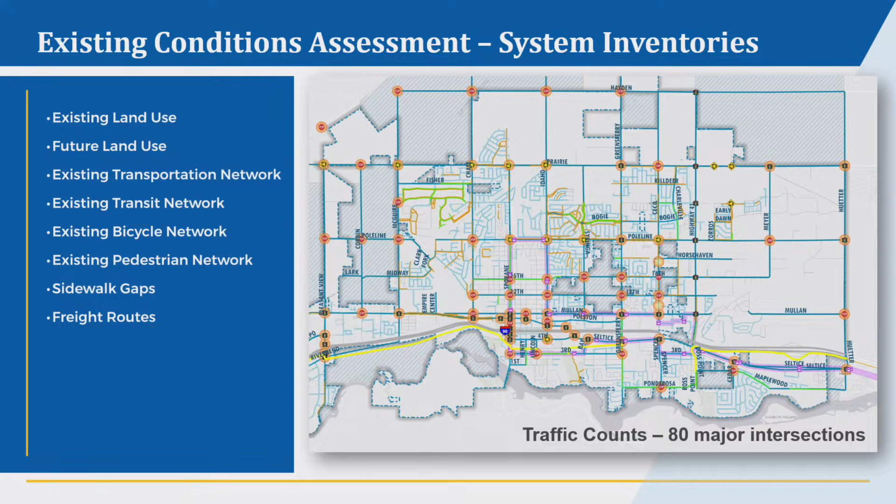Multimodal analysis was the next part of our process. And it really was truly multimodal. Not only did we look very closely at the vehicular system's performance, but we evaluated pedestrian and bicycle potential, and at the same time looked outwardly at local and regional multimodal connectivity, as you can see in the proposed multimodal projects.

And then next, as we evaluated your system from a vehicular perspective, we looked at traffic volumes in the PM peak for current conditions, and also projected that traffic into the future in 5, 10, and 20-year horizons, and looked at the impacts of that traffic on our transportation system without making any improvements, so we understand what the future looks like if we did nothing. At the same time, we looked at multimodal potential, which I'm going to share with you in just a second. We looked at the travel demand model that KMPO uses, refining that, and I'll talk about that a little more closely. And we also evaluated crashes in our existing system.

One thing I wanted to mention here is that to estimate the felt experience of transportation system users, we used our analysis tools to evaluate, as you can see on this slide and in your plan, total hours of system delay across the network in these PM peak hours, estimated amounts of gas burned while you're waiting during that delay, and also the total number of stops during the analysis periods.

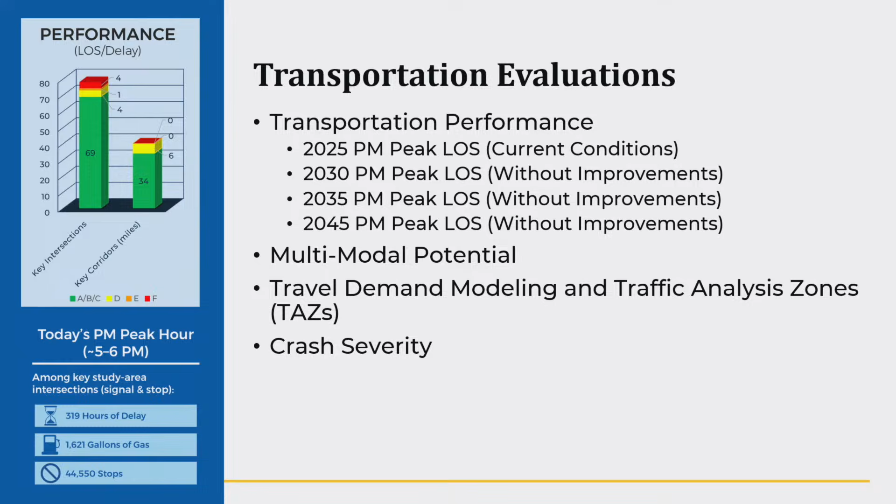Thank you. So that's the number of hours of delay experienced during that peak hour, the number of gallons of gas. And so then that's something that we would compare to in the future, and then in the future with mitigation. So mitigation wouldn't assume that we would get to, say, 0 hours of delay. This is the baseline by which we can gauge how effective those mitigation measures would be, because we've taken it from 319 to 219, and we've saved 100 hours of delay every day.

Yeah. Okay. And of course, we're all going to experience some delay, especially in the PM peak hour, because everybody's getting off work and going to the grocery store and running home and picking up the kids. And so there's going to be delay at intersections, but can we mitigate that delay so that it's minimized and the system continues to flow smoothly?

Maybe you could look at like number of marriages saved or something like that too. That is a great idea. I'm going to write that one down. Homicides avoided.

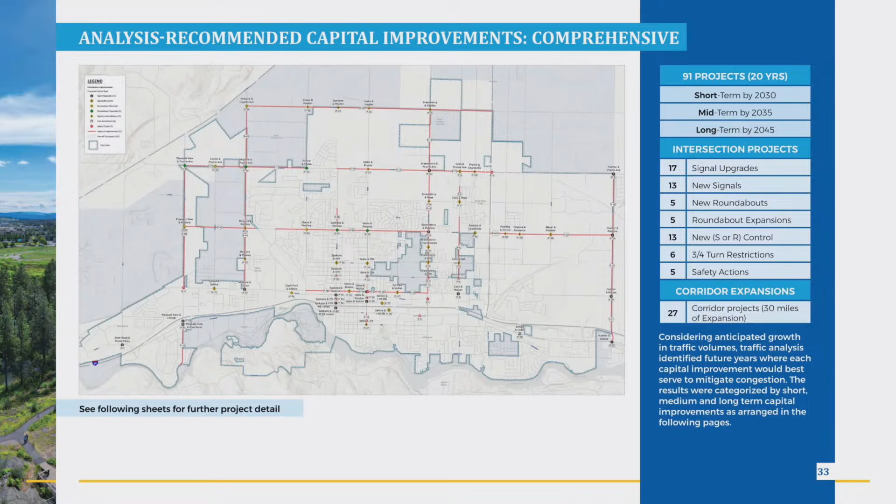So from that traffic analysis, we determined that about 91 projects would be needed to make the system operate really well into 2045. So those 91 projects included recommendations for 13 new signals, 17 signal upgrades, 5 new roundabouts, 5 existing roundabouts that need some sort of expansion, some turn lane restrictions at 6 intersections across the city, 5 projects based purely on safety needs, 27 corridor projects, including 30 miles of roadway

expansion, and then 13 intersections where we identified the improvement needed as either a signal or a roundabout, which provides the city with the flexibility of looking at either one in the future and basing the decision on the current safety needs, current capacity needs, and budget available.

Are these projects prioritized? Yeah, so they are prioritized in 3 different buckets, not necessarily in order. So the way that the project will happen is going to be dependent upon the way that development occurs. We may anticipate that a development is going to happen over here, but it gets delayed and something happens over here. So a project may move from midterm to short term. It may be shuffled around within those different buckets as well. So it's a really flexible plan that allows the city to move projects into different timeframes as they become needed.

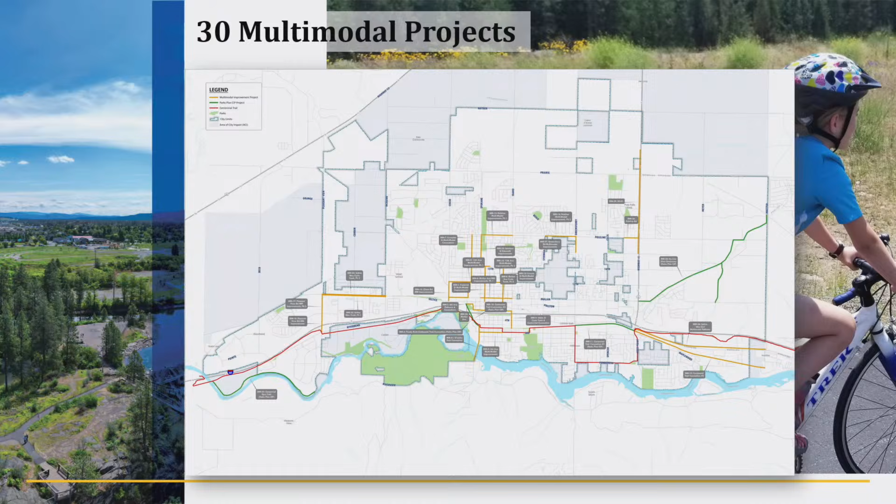So we're gonna put the snow in the bike lane on some roads, is what you're saying? Yes, probably so. Got it. Okay.

All right. So additionally, we reviewed many of the city standards used for development. So we looked at street standards, which is the width of the roadway, how many lanes they have, features such as bike lanes or pathways. And all of those are dependent upon the context of the road and its use and its functional classification. We looked at the operational standards of roadways and intersections, basically how easy it is or isn't to get around and what the city's tolerances are for when a development comes in and puts that extra stress on the roadway. What are they okay with?

And then we also looked at access management standards, which is the spacing between roadways and driveways. Wanted to note here that there's a regional policy that affects this a little bit. The KMPO Critical Arterial Corridor Policy identifies a little bit different intersection and access spacing, and Pleasant View, Prairie, Hayden, and Greensferry are all considered regional critical arterial corridors. And then we also reviewed the traffic impact study standards, and all of these are included in the new TMP.

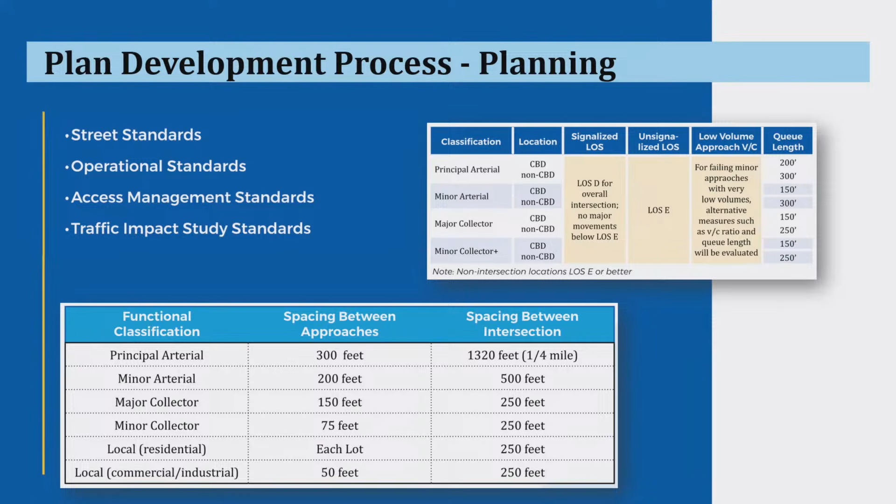So next is the implementation planning. So when do these projects really need to happen? How do we make them happen? Kind of what we've been talking about. We're taking the raw data, the raw output, this is what's needed, and then bring it into what we know locally. So it's all based on timing, based on anticipated growth patterns and our regional modeling. The timing of this is based on the best information that we have now, and again, things will change. But it does provide the city with flexibility to move things around according to development potential, funding availability, and what's actually going on.

So this is a list of our refined short-term projects. This is what we're calling our implementation table. So in the plan, there's a detailed project description, expected cost, including cost sharing, and expected impact fees, direct developer costs, and then other sources such as grants from state or the federal government. So the grand total for our short term is a little bit over $10 million in 2025 dollars.

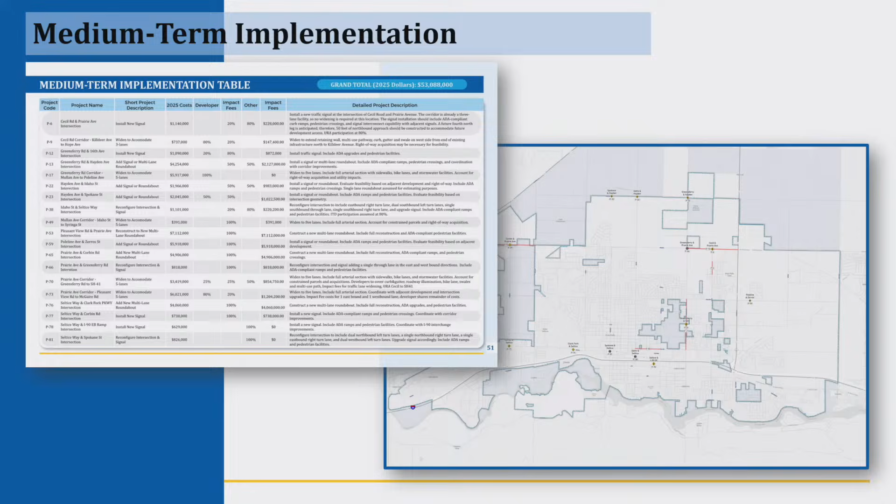So then this is the midterm implementation list. Same information, detailed project description and impact or cost sharing, developer costs, et cetera. Grand total for this group of projects is just over $53 million in 2025 dollars. And then finally, our long-term implementation list. The needs really start showing up here. It's a longer term. This is a 10-year window where the other two were 5-year terms.

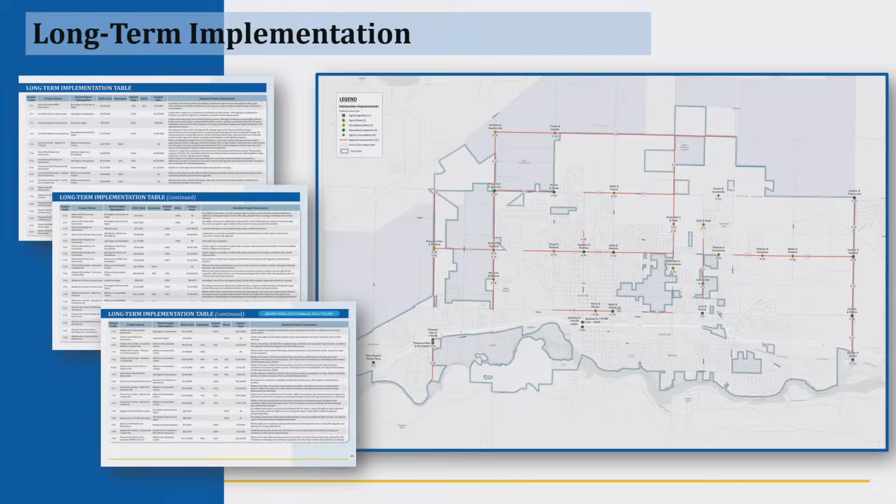Do want to mention here that a significant number of these projects may or may not be needed depending on the outcome of the Rathdrum Prairie Transportation Study and the ultimate build-out of I-90 and what happens with the interchanges along I-90 through Post Falls. So bottom line on this one is almost $262 million. And that's all just capital improvement projects. That doesn't include anything having to do with maintaining current infrastructure. That's correct.

And this is assuming that the growth that we have experienced in our region over the past 10, 15, 20 years continues to occur. So, should there be a slowdown, this would change significantly. Okay.

So finally, in our process was the development of a GIS story map. Two kind of sections of that. So the first part is a community tool. So instead of that 800 page PDF that is super inaccessible for the public, we developed a public-facing interactive map that summarizes the entire planning process and will be available to the city and public with the adoption of the document. With this web map, community members can scroll through and see what projects are planned in their neighborhood or on their commute.

Some benefits is obviously keeping the public informed of what the city's planning and what they've got going on. Additionally, there's some potential time savings to city staff. Say somebody sees an issue somewhere, they can go to the map and they can see that the city recognizes that there's an issue and that there is a project planned for this intersection or this roadway and the general timeline of when that might occur.

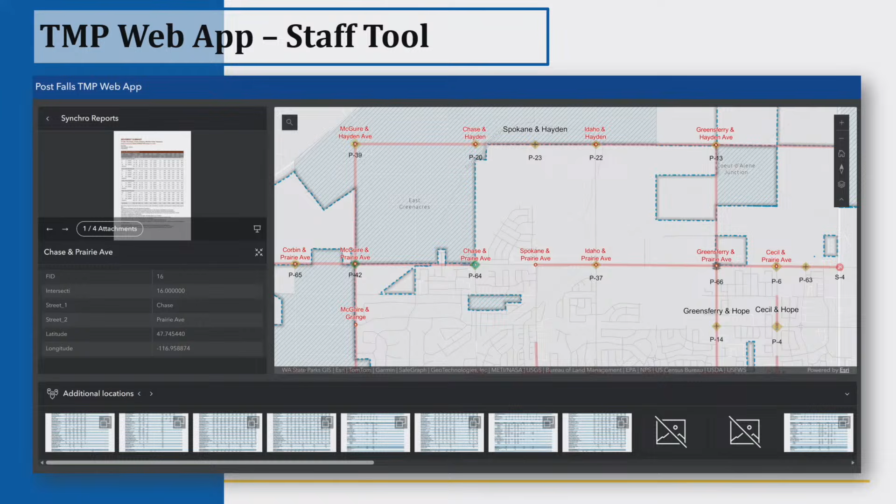and projection data. So in summary, it's a tool for staff that relieves the need of a big, thick document, although I've seen Rob and his well-loved transportation plan all tabbed up. We think this will be a much easier tool for him to use. That comes to the end of our presentation. We'd love to take any more questions if you guys have any.

I'm still concerned about the north-south corridor, and I guess my question with regard to the decision that we're making tonight is, is there an ability to review the master plan and look at the necessity of implementing something that is able to bring commuters north and south, like Prairie, Seltice, and the 90 take residents east and west?

Yeah, so based on the functional classification of the roadway, you go from local to collector to arterial and then principal arterial freeways. Along that step of going up the classification, you're expecting less delay, all the way from there's a driveway every 20 feet on a local roadway where you've got to go 20 miles an hour, all the way up to an access-controlled freeway type of a situation. So

from my understanding, the city network generally is more of that lower classification of roadway, where it's really providing access to homes, access to businesses. There are some arterial roadways that are meant more for that long-range travel. Right. And that's why we have the... And how would one do that from north to south if you needed to go from Pole Line to Seltice?

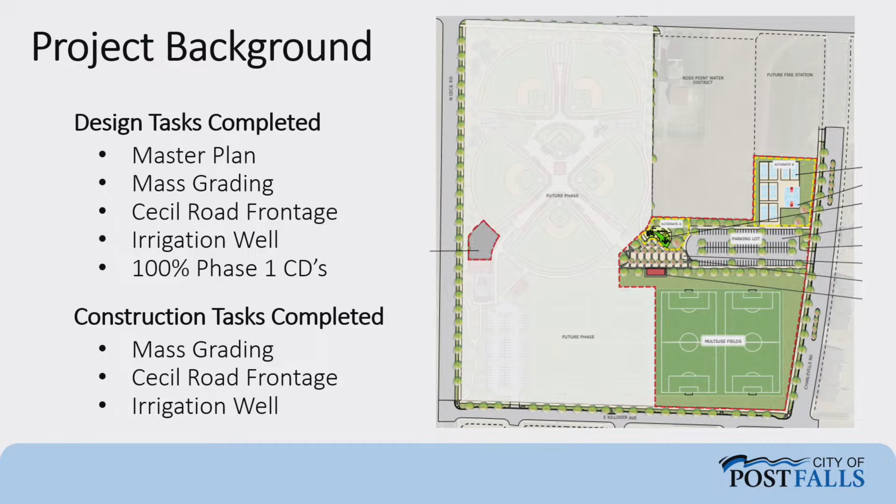So just quickly going through some of the background on what we've done to date, starting back in 2019 with the master plan, and then followed up by the mass grading plan, which then we did the mass grading construction throughout the entire site, and then we moved on to the Cecil road frontage design, completed that road frontage construction, designed the irrigation well specs, installed the irrigation well, and then most recently completed the 100% Phase 1 CD package, and that is the project here this evening for construction.

A few of the recent council touch points. Back in 2024, we requested approval to apply for the Land and Water Conservation Fund grant. A few months after that, we did a lot line adjustment. If you recall, there was a lot line that was going to run right through the middle of our building here, so we moved that lot line just this way here. And then November 2025, we received approval from the state for the Land and Water grant, which was accepted by council.

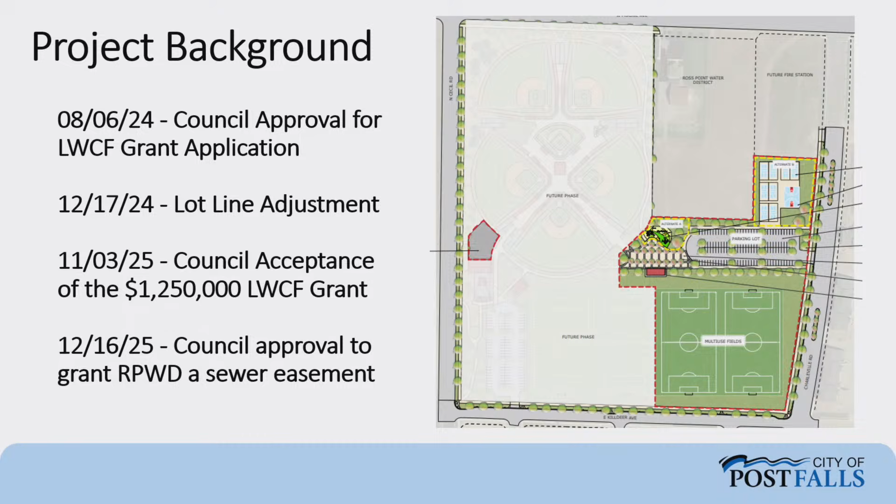And then a month later, council approved an easement for Ross Point Water District for their existing sewer service that runs on the north side of our property here. Was there any discussion in the lot line adjustment conversation about acquiring some of that southern portion of the Ross Point Water District property? No, not at that time. Okay, thanks.

So to recap, Phase 1, we'll be installing 2 multi-use fields, a restroom and a shelter building, a large parking lot, an entry plaza, and then the maintenance yard. And I'll touch a little bit on the alternates in a moment. Those blue things aren't pools, are they? Those are courts. No, they're not.

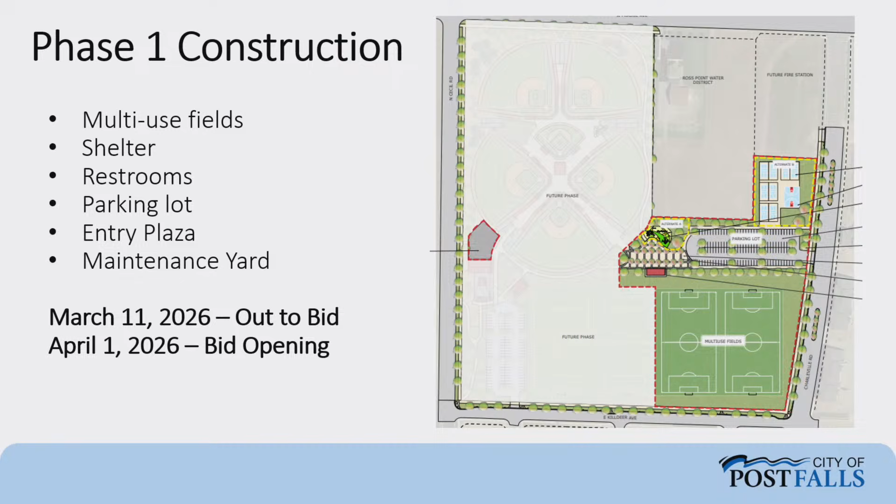So we put this out to bid March 11th and had our bid opening on April 1st. We received 1 bid from LaRiviere for just under $4.9 million, which came in about $138,000 under the engineer's estimate, so pretty close to the estimate, which means we weren't able to move forward with any of the 2 alternates, which one was for the playground and one was for the sports courts. Any guess on why nobody else wanted to bid?

So, great question. We had a pretty good turnout at our pre-bid meeting, which was mandatory. And I would say we had about 40 people there. Not all of them were primes. A lot of them were subs. But I think there were about 5 prime contractors that could have bid it. And we were a little surprised as well. So our consultant did some phone calls to the contractors, and I contacted a few just to see if there was anything glaring that we may have missed.

And a lot of it came down to timing. One of the contractors said they ended up being awarded like 4 projects during that window, so their season was basically full. The other one, again, was just timing part of the year that they couldn't do it. We actually had a nationwide sports complex builder that was there, and he had actually been contacting me every year for the past 4 years. So he reached out to me saying, how did we come in on our bid? And I told him he didn't bid it.

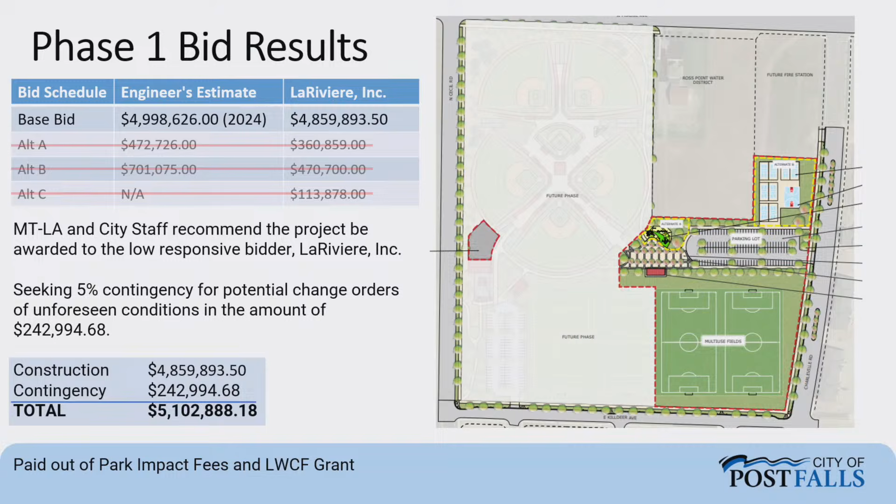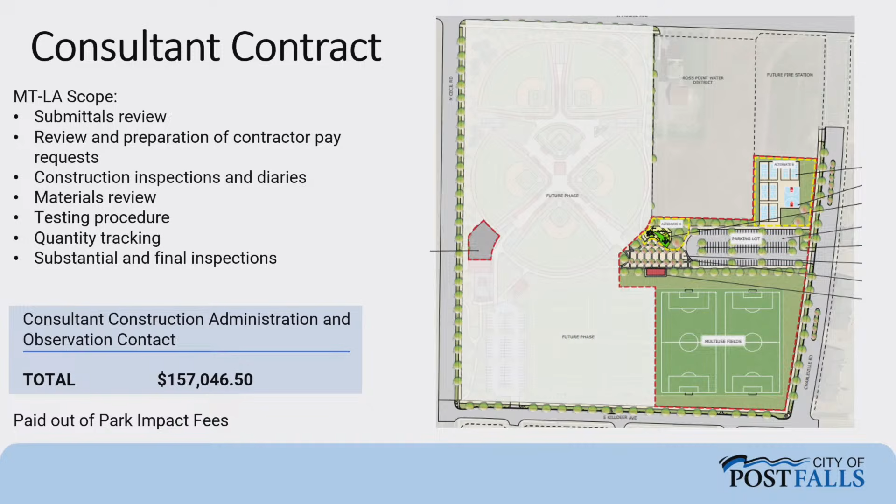And then the second portion, another contract would be with MT-LA, our consultant, for the construction observation throughout the project, which includes submittal reviews, pay app requests, inspections, daily logs, material reviews, and quantity tracking. So that contract came out to $157,046.50, and that would be paid out of impact fees.

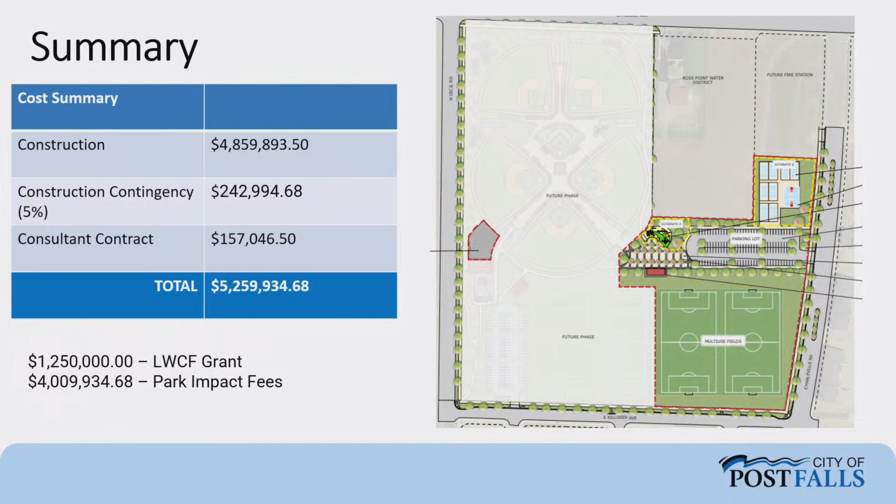So the total ask this evening for both contracts plus a construction contingency is $5,259,934.68. And again, $1.25 million of that being paid out of our grant and the remaining out of park impact fees. If approved this evening, we would issue a notice to proceed for May 2026, anticipating an 8-month construction window with substantial completion around November and final into December, and then most likely contract closeout in a January, February timeline. With that, I'll stand for any questions.

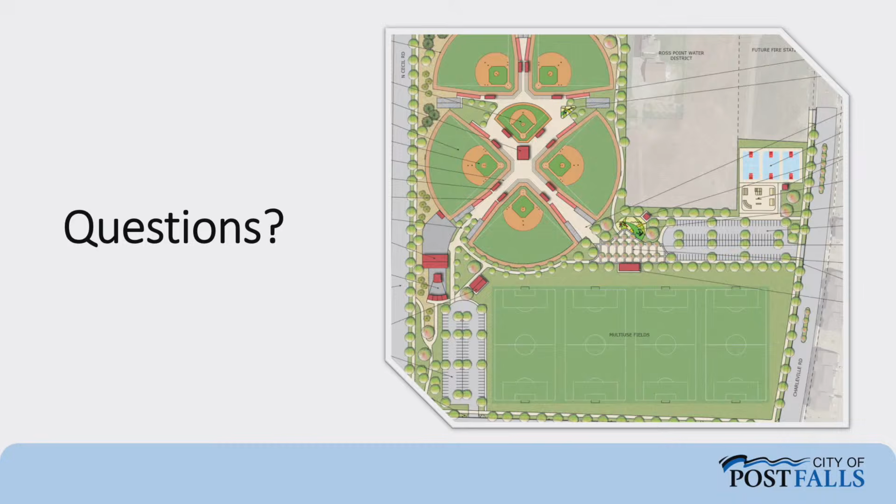If you go back one slide. What's that parcel to the left that's darkly shaded that has a line to it but no description? That is the maintenance yard. Right here? And so that's part of phase one? Correct, yes. So that's where our well is currently drilled, and so we'll be obviously hooking up the pumps for that situation. That's where the main power is coming into the site, and it will be where a future maintenance building is, which you can see right here. Okay. So it will be fully fenced at this point and a gravel maintenance yard.

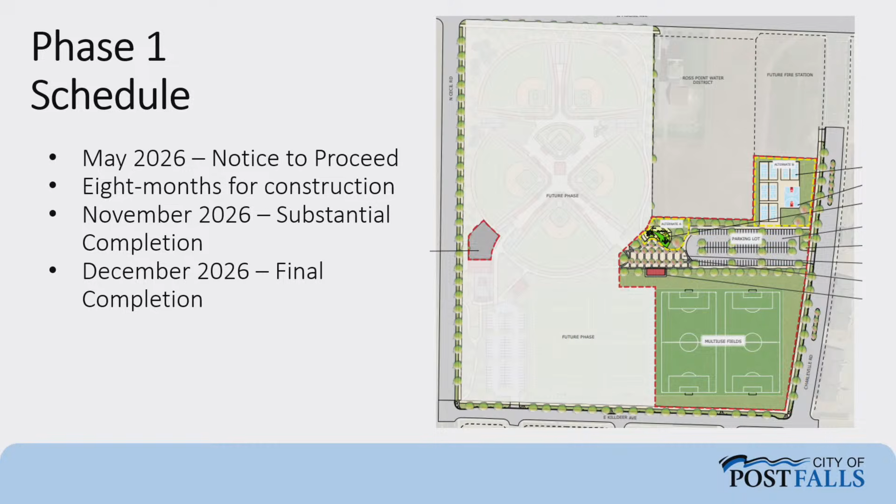Are there bollards to keep vehicles, vandals from traveling on the fields? Yes. There's a curb, and we do have bollards kind of in this area here where there's the ADA access. They also have curb stops for those, but the ADA is flush. But the bollards are there actually more for a maintenance standpoint, so we can access them. Some are removable, and we can access the fields. Thanks. And we do also have bollards in this area here as well to prevent vehicles from traveling into the plaza, but the plaza is set up to be used for food trucks et cetera, so we do still need vehicle access to there as well.

Further questions? Quickly, with La Riviere's bid and your contingency, you're about 104,000 over your engineer's estimate. Is that of concern to you at all? No, I don't think so. We have it budgeted either way, and I think the estimate didn't even include a contingency, or I guess it was kind of built in. But the short answer is no. Okay. We have it planned for the future. Everything is still laid out on track for all the other projects we have committed to as well.

I would move to approve the Quarry Sports Complex Phase 1 construction agreement. Second. Motion and a second. Further discussion? Roll call, please. Mosby, aye. Blue, aye. Ziegler, aye. Stigleader, aye. Luca, aye. Malloy, aye. Motion passes. Thank you.

Next up is Seltice Way Rehabilitation and Pipeline Project recommendation to award. Good evening, Mr. Mayor, members of the council, Andrew Arbini, Projects Division Manager. So this is a very significant project for both the Utilities and Streets Division. It will accomplish both current and future needs. As such, we've taken a team approach in presenting all the information tonight. So together, Jackson and I will cover the project material. Just to clarify, this presentation includes both items B and C on the unfinished business. They are separate action items, but related as they're connected to the Seltice project.

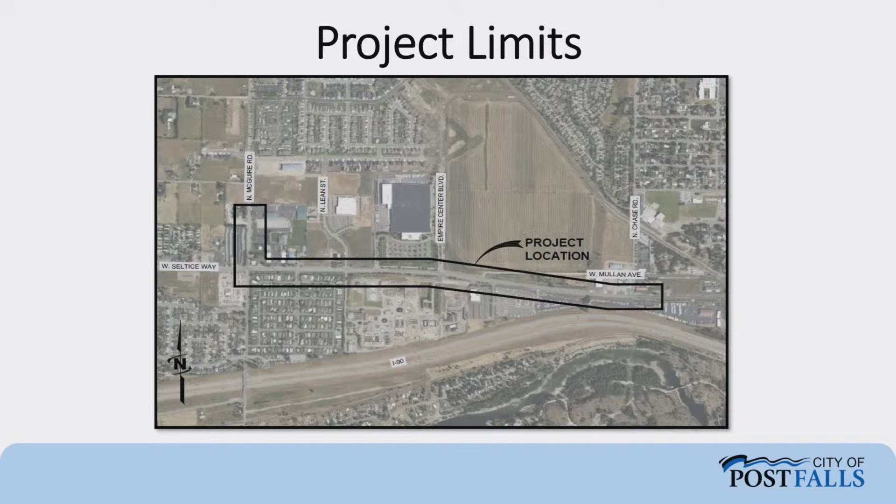We did put together an outline of the presentation. I'll cover the first half, talking project background and the history, and then Jackson will cover the construction phase and the request of council this evening. Project limits are Seltice Way, generally from Chase Road to McGuire Road. So I'll start with what we're building with this project. This will install the future utility needs in Seltice Way. This is all the wastewater pipelines that have been identified in the master planning documents.

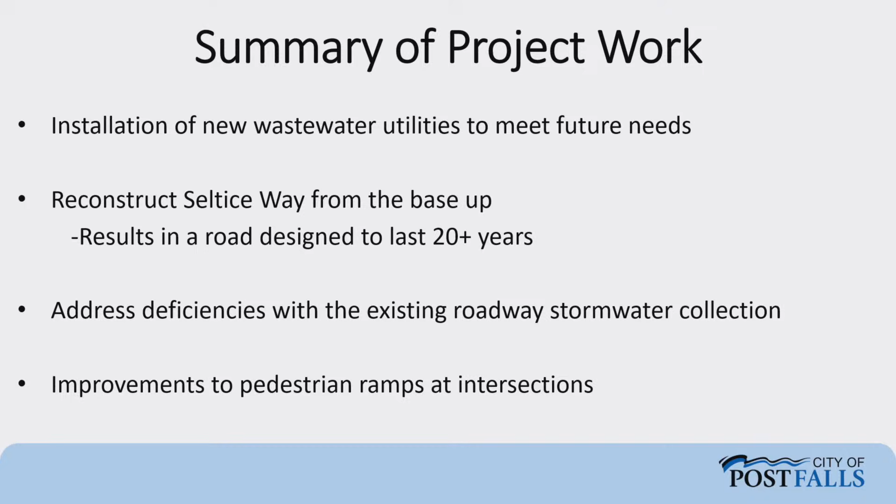As a result, we're reconstructing the roadway. This is a complete rebuild, removing all the subsurface material, including the original concrete highway underneath the roadway. So it starts from the subgrade and we'll rebuild back up. That level of work is based on a 20-year design, so envisioning that this road will last at least 20 years. We will also be addressing some stormwater deficiencies within the corridor and making some minor improvements to pedestrian facilities and the trail that runs through the project area.

Andrew, did it have to take it down to the base because of neglect over time? It's unusual, isn't it, to go that far down? So there's a combination. Yes, this is the first project that I've been involved with at the city where we've done a full rebuild of the roadway. Historically, this was the US 10 highway that ran through that corridor. It was approximately 20 feet wide. Over time, Seltice has built on top of that roadway. So there's been improvements done, but nothing that's addressed the subsurface area.

So I'll talk a little bit about how we started at rehabbing the road. As we got into that design, it became clear that there was an opportunity to also include the underground infrastructure that's needed in the future. So that also drove some of the decision-making in removing that concrete and subsurface material. But there was a large amount that would need to have been removed without putting the utilities in the ground. That probably covers a little bit of the talking points I was going to go through one by one.

So the existing pavement's in poor condition, and to the best efforts of the Streets Division, we've been able to maintain that and patch it, but the ultimate solution is to replace the roadway. A pavement condition study was done around 2020 citywide, and that confirmed that Seltice does need some attention. We supplemented that with a geotech report, working with a geotech firm, and they were able to map out the subsurface area as well as the extents of the concrete highway underneath.

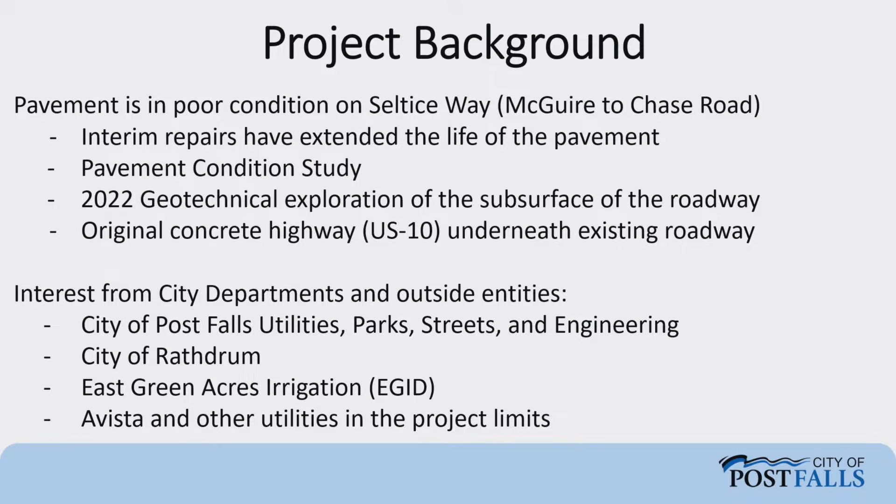So during the design, we brought two separate MOUs to City Council. Those were approved. One was with City of Rathdrum and the other with East Green Acres Irrigation District. I'll run through each one just as a background of what's entailed here. So for those that may not know, the City of Rathdrum pumps their wastewater to the City of Post Falls and is treated at the Post Falls Water Reclamation Facility.

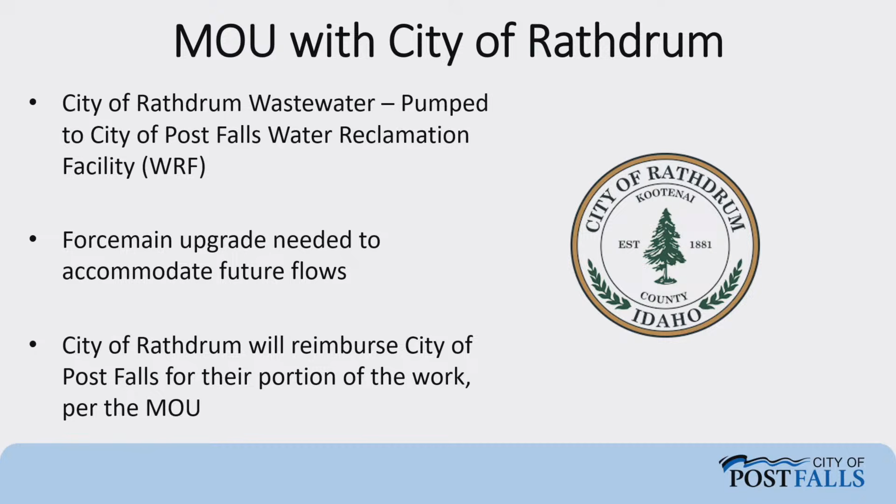They have a need for another force main pipe to accommodate future flows. So similar to City of Post Falls' future wastewater needs, they also have similar needs. They were very interested in participating in the project and combining their work with ours. That MOU outlines reimbursement from City of Rathdrum to Post Falls for their portion of the work.

And similar method, we initiated an MOU with East Green Acres Irrigation District, so EGID for short. They are a water purveyor that serves a portion of the City of Post Falls. So they have infrastructure in the Seltice Way project limits. There's an agreement in place between City of Post Falls and EGID that predates this project.

And that essentially outlines that the entity performing construction work impacting the other entity's infrastructure shall be responsible to protect the other's work. So in short, City of Post Falls is responsible to protect East Green Acres' work as we impact it in this area. East Green Acres will perform that work, they'll protect their lines, and then they will be reimbursed by the City of Post Falls for that protection. That allows them to remain in control and ensure that their work is getting done per their requirements.

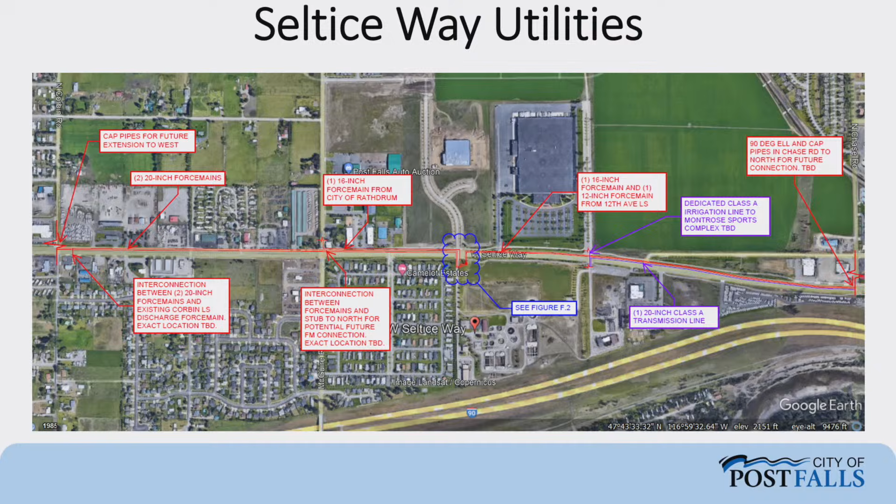So summarizing the benefits of having both of these MOUs and these entities, really it got all of us talking early on in the project, and we were able to coordinate and identify those opportunities. And then through the MOUs, we're able to establish the roles and responsibilities of each of the parties. So I'll call this the Crayola version of the utilities and what we're putting in the ground. It's 6 different pipelines that we're installing, including City of Rathdrum's line. So a significant amount of infrastructure that will go in ahead of rebuilding of the road.

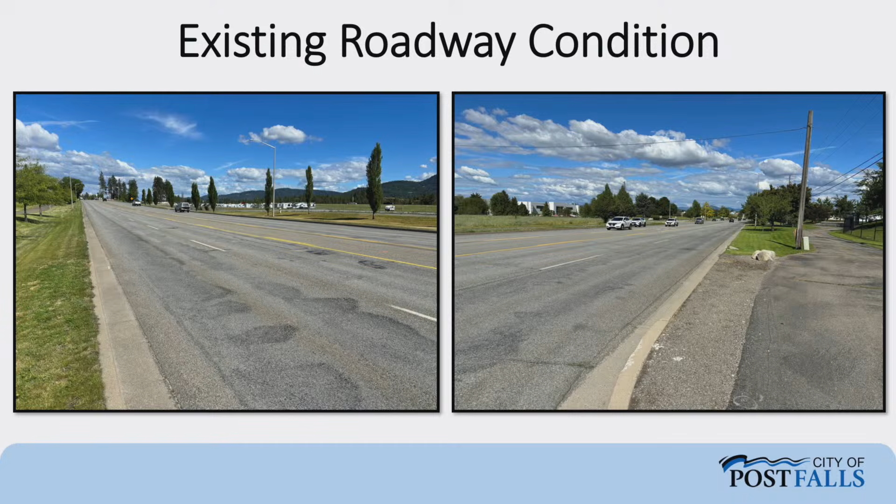Good evening, Council. We had to keep it interesting for you, so fresh face.

So we opened bids for the project on March 24th. MDM Construction Group was our low bidder at just under $5 million. Engineer's estimate was 9.3, slightly under that. The bid that came in from MDM has been determined to be the lowest responsive bidder. Their bid amount came in with the requested contingency that we're asking for of 10%. The total request we have for you tonight is $5,429,878.30.

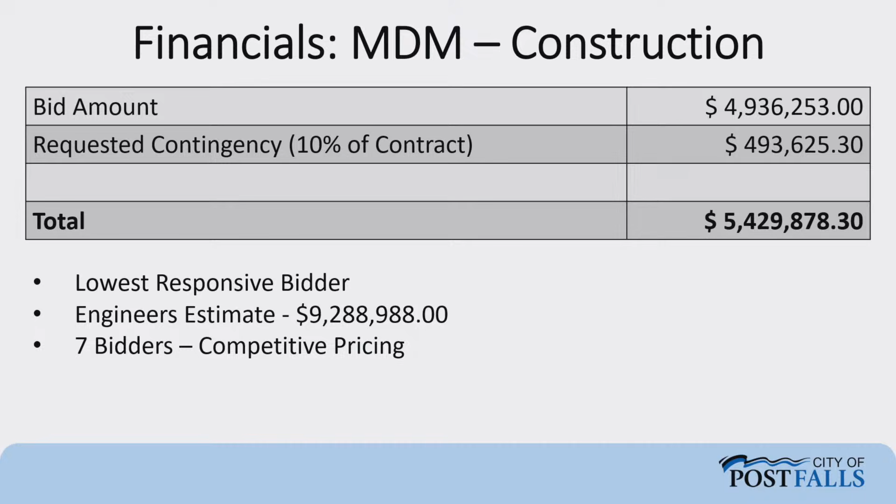We did get 7 bidders on the project, and there was a handful of bidders that were fairly close, so we feel that it was a competitive bid environment. Construction management services on this project are more significant than they have been on previous projects. Large reasoning for that is that we cannot shut down this entire corridor to the city. To be able to complete our project, we had to go about this in phased approaches to allow for traffic to go back and forth during construction.

We will have some limited closures of the McGuire and Chase intersections. So there can be some anticipated night work as well as some work outside of Monday to Friday to try and efficiently get those intersections done for the public. We also anticipate 2 construction seasons, and we will have full-time observation on site. So that's some of the explanation for why services are more for this project than others. So during construction, with that phased approach, you're going to have observation on both sides versus closing down the entire road. And we have some pretty comprehensive public outreach planned to help mitigate traffic impacts to the public during construction.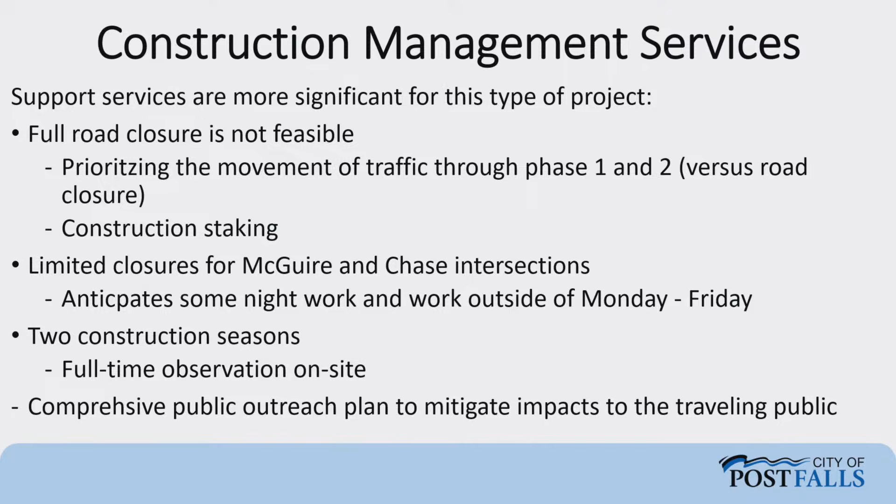The award itself, so the contract amendment for construction management services is the 1.2 million number. We are requesting a 10% contingency on top of that, retiring all unused contingency from the design contract. So the total ask for CMS tonight is $1,353,770. The total request for both the construction award and the CMS service amendment is $6,783,648.30.

How much unused contingency did we have from the design phase? I would have to get you an exact number, but it is absolutely above 80,000 or so. Close to all of it? Of the management reserve contingency, yes. And then it was retired to where? Back into the budget line item that it would have come from. Okay. Great. Perfect.

During all of this, and per our MOU and conversations with Rathdrum, Rathdrum would be invoiced their proportionate share. That is an important point to note. So, do we know roughly how much that is? Yes. So overall project cost share. These are approximate numbers because during design versus construction management, some of those numbers fluctuate slightly. But overall project cost is estimated to be approximately 7.9 million.

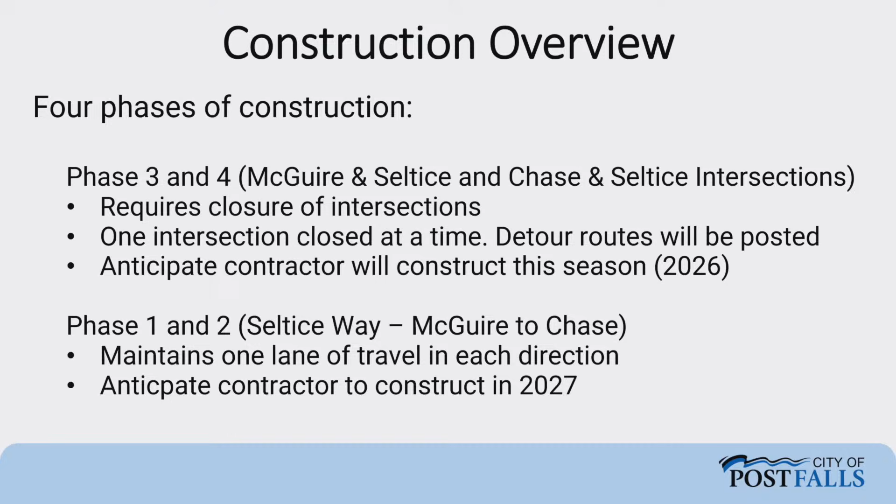Phases 1 and 2 are the north and south half of Seltice. Again, we're doing those in phased pairs, so one can happen, be finished up, and then we flip over to maintain one lane of travel in each direction. And we anticipate that to occur in 27. As for next steps, we anticipate construction this summer through summer to fall of next year. We'll have public outreach occurring throughout all phases of the project. Road closures and detour routes will be published in advance, and all of these updates will be posted to the city's social media page and website.

Will there be any disruption during the winter shutdown? Like, is anything going to be closed and coned? There's some flexibility that the contractor has depending on how they approach these phases, to where there may actually be a world where they can work through the winter. Weather is so fickle here in North Idaho. During that shutdown, if and when it occurs, all of that will be properly coned off, blocked off, marked off. But no lane closures, maybe just like trench plates and cones or something? Depends on the phase that they're in. During the winter shutdown, there shouldn't be, no.

Well, 3 and 4 are just intersections, right? Correct, yes, that's absolutely correct. So next year, it's all going to happen during the construction season? Yes, I'd love to give you a perfect example of how I can see it happening. I could see phases 3 and 4 occurring throughout summer, normal construction season, and then January, there's a wild hair, February wild hair, the contractor wants to get going.